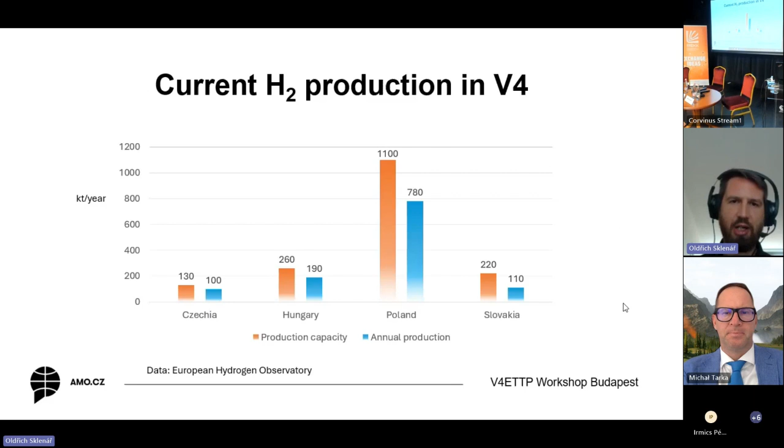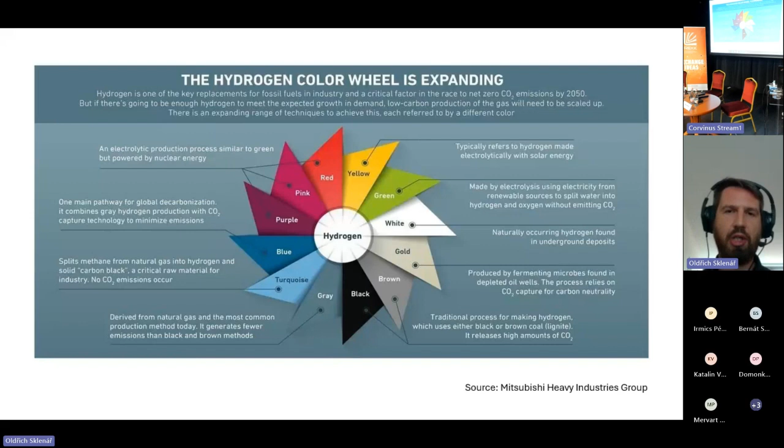So let's begin with the current situation. On this slide, you can see the current production capacity and annual production of hydrogen in V4 countries. As you probably know, there are different kinds of hydrogen. I mean, from chemical perspective, it's still the hydrogen, but there are different ways how to produce it. What you can see is the most complex color scale which I was able to find of the hydrogen, including white hydrogen, green hydrogen, or different shades. When we are talking about current hydrogen production, we need to also talk what are the existing ways we are using to produce hydrogen.

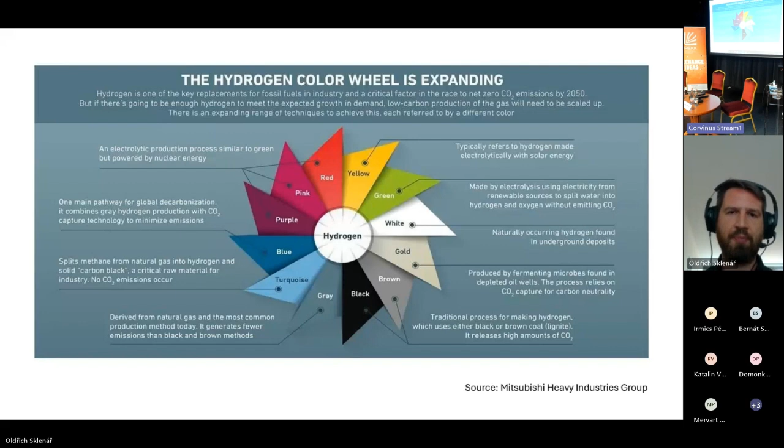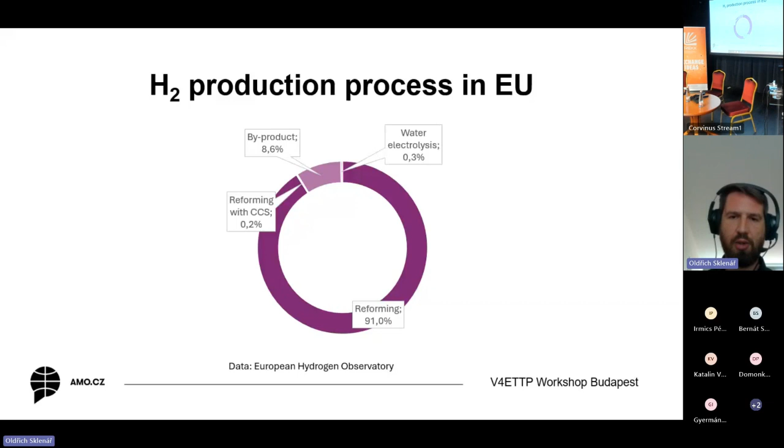When we check the situation in EU, we can see that more than 90% of current hydrogen production is provided by steam reforming based on a natural gas. And only 0.2% is provided by reforming with carbon capture, and 0.3% is provided by water electrolysis. That's the situation in EU, and when we check the situation in V4, we can see that it's similar. More than 90% is provided by reforming. Small fraction is represented by byproduct production.

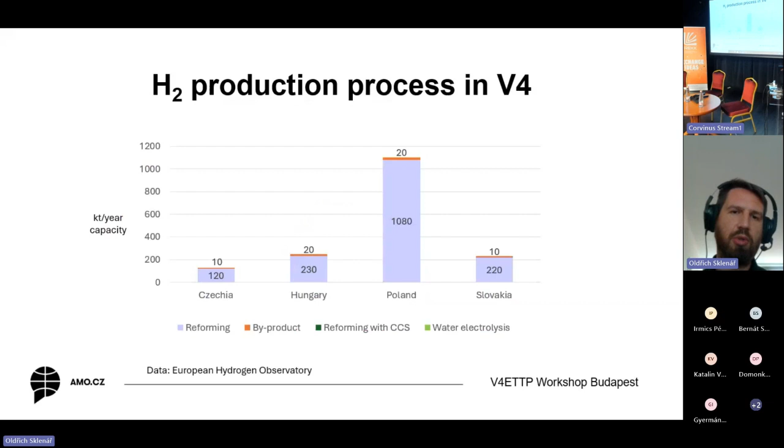But in 2022, from when this data are from the European Hydrogen Observatory, we can see that in V4 there were almost no CCS nor electrolysis projects which are able to produce green or some form of low carbon hydrogen. So that means that we have to replace not only mentioned natural gas, but we have to switch the current hydrogen production to some low carbon variant, to low carbon alternative.

What are the plans for the hydrogen? You can see the chart showing the national hydrogen strategies and their objectives for 2030. In Czech Republic, there is a plan to have 400 megawatt electrolyzer capacity with utilization between 30 and 50%. And the utilization actually depends on the renewable resources which will be used for such a production. If it will be only some photovoltaic or some combination of different resources, depends on the specific installation.

In Hungary, there is not only plan for electrolyzer capacity, but also there are mentioned objectives for the green or low carbon hydrogen. And you can compare it with current production, which is actually 10 times higher than those objectives. In Poland and in Slovakia, there are again some plans for electrolyzer capacity. Those are hydrogen strategies, but as I mentioned at the beginning of this presentation, hydrogen or green hydrogen is not the only existing low carbon gas.

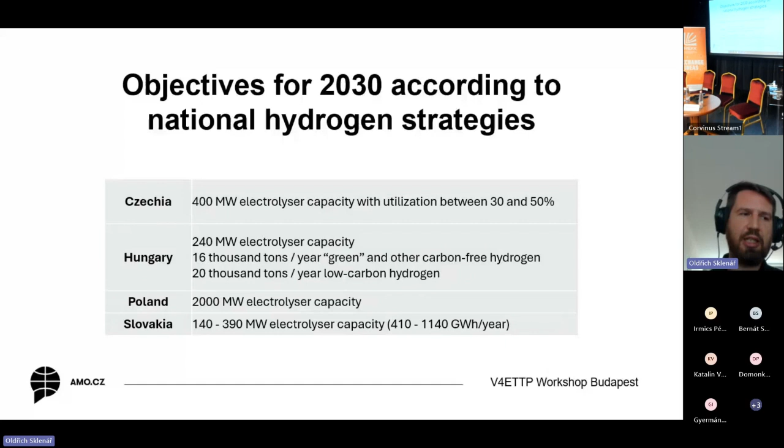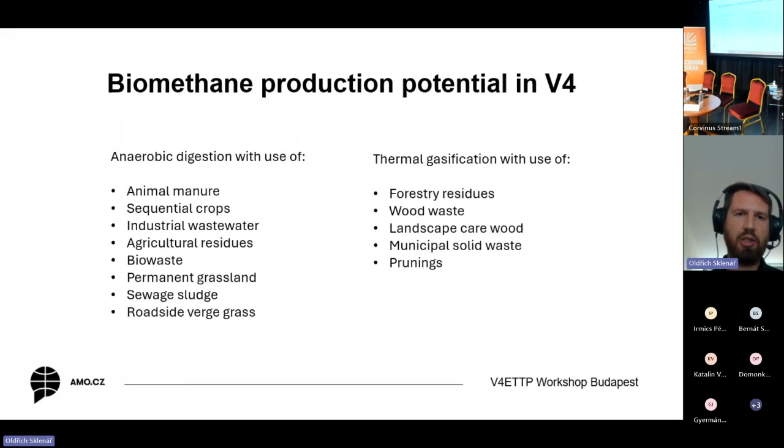Please don't ask me on the details because I'm not familiar too closely with the topic of agricultural production, but it's related with switching of the crops on the same field. So it's actually biomass planted by purpose for such a way of utilization.

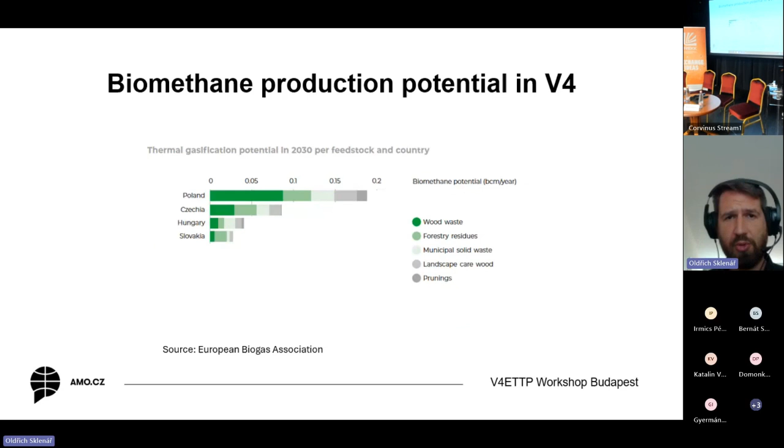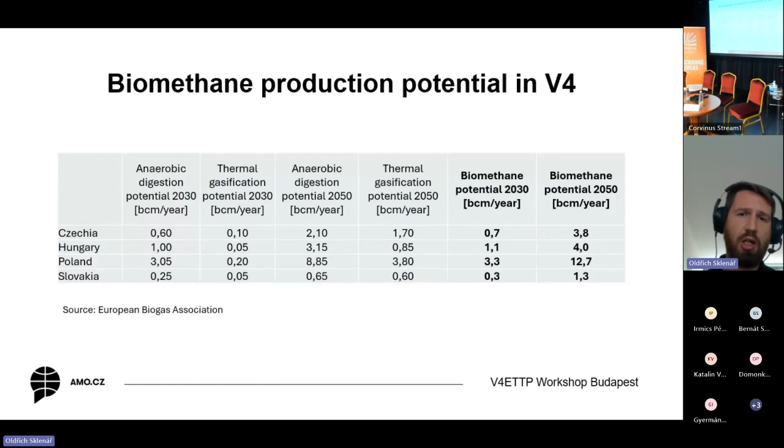On the other hand, the thermal gasification has also some potential, but when you check the scale, the values in BCM, you can see that it's actually not really comparable with the anaerobic digestion potential. So that was thermal gasification potential for 2030 and for 2050. Anyway, here you can see it in one complex chart. And you can see that the potential in 2050 is actually quite significant. To put it in the graph, you can see that the long-term potential is much higher than the near-term one.

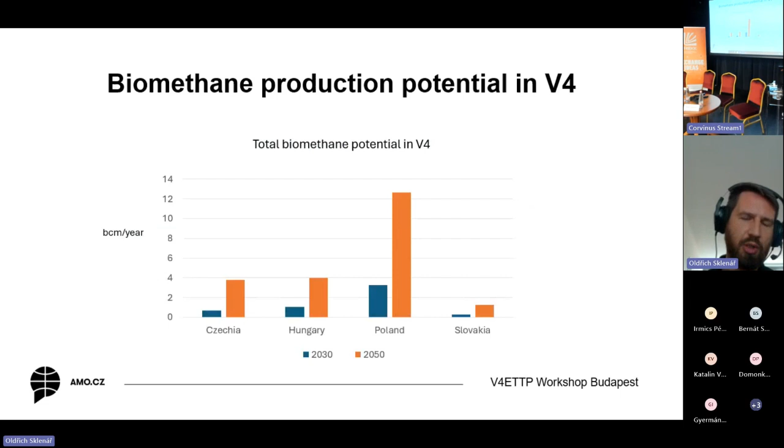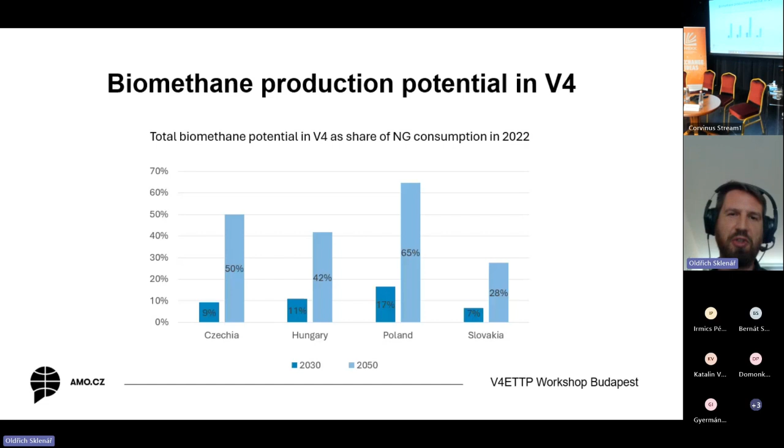But what is, I guess, more important is to compare this potential with the current natural gas consumption. So, according to a quoted study, in Czech Republic, Hungary, and Poland, in a time frame of next 25 years, we are potentially able to replace around 50, in the case of Poland more than 50% of current consumption of natural gas by biomethane. That means actually that that's the estimated potential. Other question is how we will be able to fulfill those numbers.

The rest of the future need for low carbon gases should be, or must be, covered by imported green hydrogen or some different low carbon forms of hydrogen which are not emitting CO2 into the atmosphere, or the same way we can actually use the natural gas in combination with CCS, if this technology will be available in such a time scale.

Maybe a short note to previous discussion. The deployment of this technology actually depends not only on some technical development, but it's also kind of site-specific, because you need to have some underground storage, and not every area is suitable for such purposes.

So just to remind that there are also other sources for green hydrogen than in Europe. So in the future, there is huge potential worldwide. So for sure there will be some green hydrogen available. Another thing is how to transport this hydrogen into V4 countries, into Central Europe.

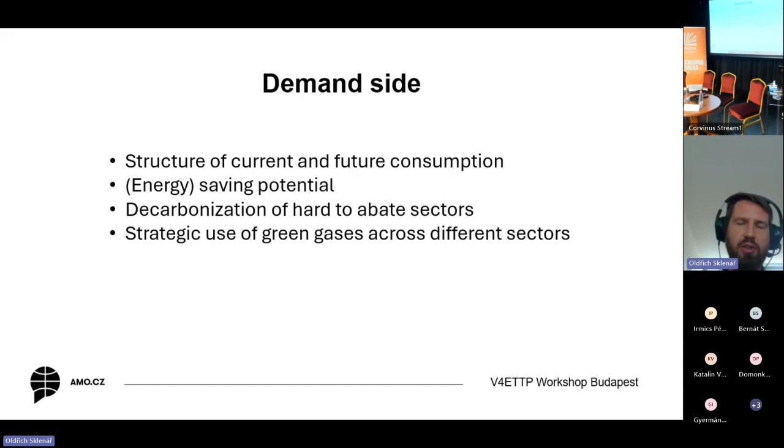When I talk about structure of current consumption, I mean that if you check the current situation in Czech Republic, we are using natural gas mostly for space heating. Almost half of current natural gas consumption is related with the consumption of heat in companies. Half of this heat is process heat, but the second half is related to space heating. So together with production of heat in households, we are talking about approximately half of the current consumption of natural

gas is used for heating, which is maybe again not the best way to use this fuel, to just burn it in the boiler in the stove with efficiency smaller than 100%, when we could use this fuel, for example, to balance electricity production, to increase the possible penetration of renewables into the electricity grid, and to produce electricity, which then could be used for space heating with heat pumps with efficiency several times higher compared to current gas use.

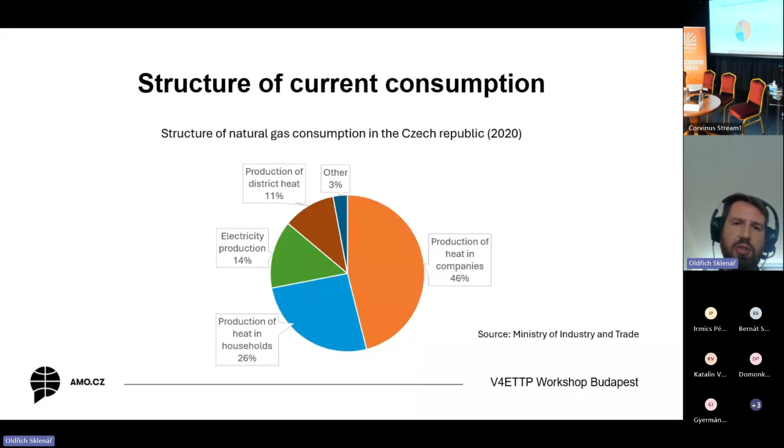So the last slide is showing one of the outputs of the Austrian hydrogen strategy, which is showing some preferred strategic use of, in this case, green hydrogen, showing that, for example, for individual heating, it's definitely not the best way. In the sector of transportation, the same is to use hydrogen for personal cars. In the case of trucks and buses, this depends a lot on the profile of use of such trucks and buses, because we can observe increasing possibilities of battery technology of

electric vehicles. But of course, in case of aviation, there is really limited use of batteries, and when we are talking about long-haul flights, then there is no other way than to use hydrogen in the form of some cryogenic fuel. In industry, it's similar. When we are talking about low temperature heat, it's not necessary to use such a valuable fuel as green hydrogen, or other green gases, when we are able to use high temperature heat pumps. But of course, in the case of, for example, steel production or chemical industry, there are actually no other ways than to replace current technologies by green hydrogen or its alternatives.

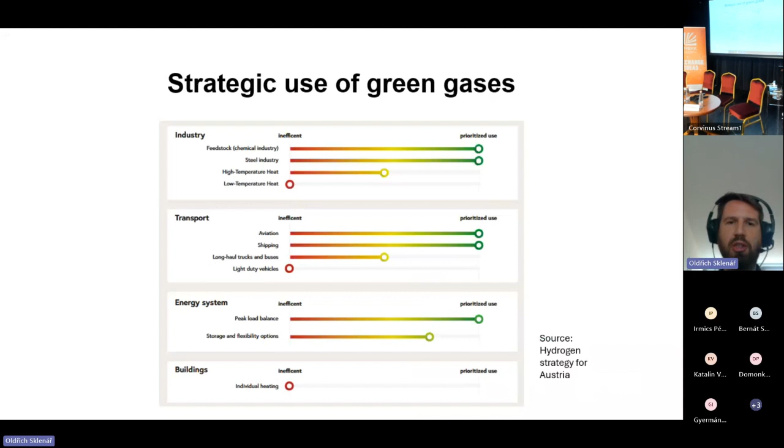So that was a short introduction, and now some questions for discussion. What is actually the realistic potential of biomethane production, comparing the numbers I presented? What is the future potential of green hydrogen? And I'm talking about local production versus imported green hydrogen, and its application across different sectors, which is related, of course, with the options for import not only from Europe, from the countries where they have better conditions for renewables, but also from other countries overseas, for example.